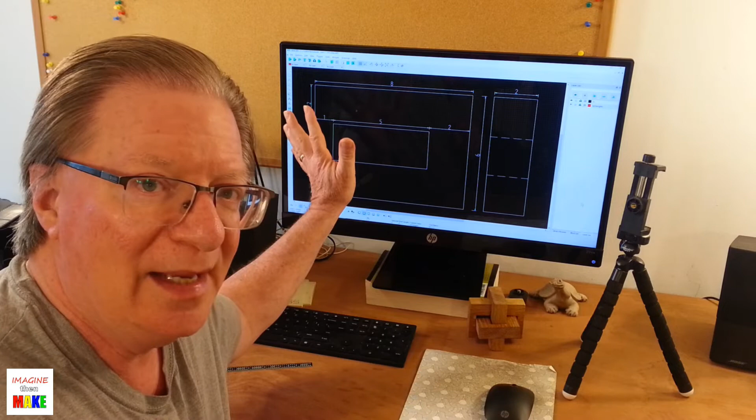I'm going to be looking at using LibreCAD and specifically using the print to scale feature that's built into the program. I've been using LibreCAD for quite a while now, and honestly, I don't know why this particular use for the print to scale feature didn't occur to me earlier, but it just didn't. Now that it has, and I've had a chance to try it out, I'm excited to make a video about it because I know it's going to save me a whole bunch of time as I build projects. I thought maybe some of you guys would like to understand what I'm talking about and save some time when you're building your projects.

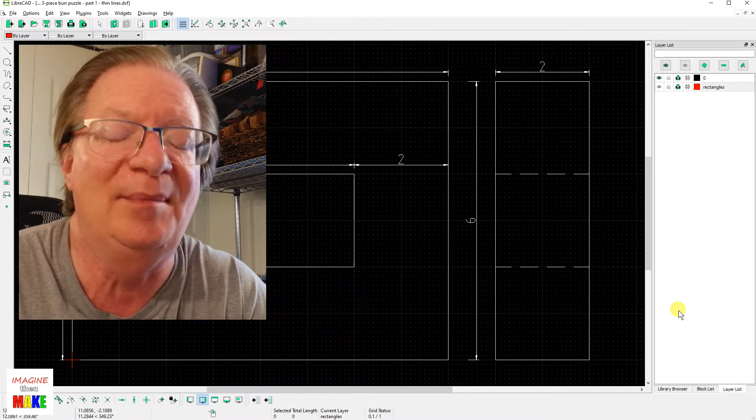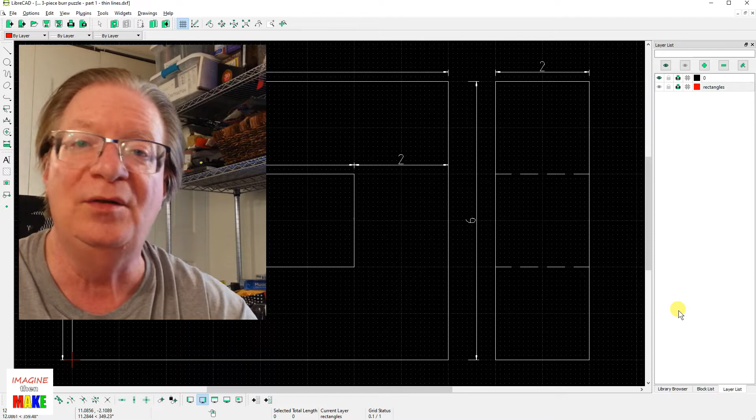You're probably wondering what I'm talking about with this print to scale feature built into LibreCAD. If I back up a little bit, in my previous video, I showed how I modeled a 3-piece wooden burr puzzle in Blender. Before I could create the 3D model in Blender, I described how I drew up the 2 or 3 pieces that make this puzzle up using LibreCAD. Here's what one of the drawings looks like, and here's what the other drawing looks like. The pieces are very close to the same - they're 2 units thick according to the drawing.

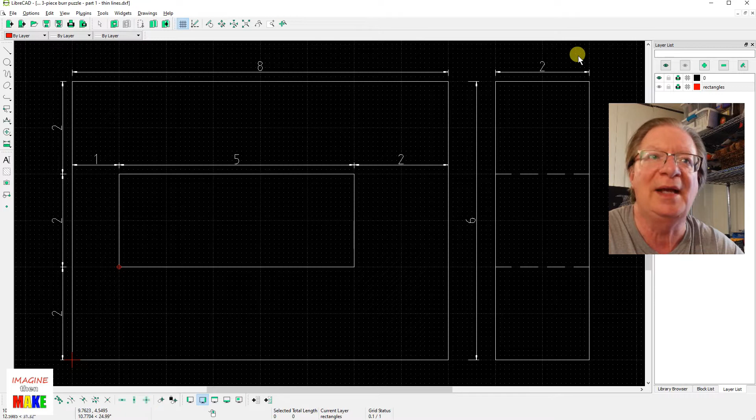You might notice, as I mentioned in the previous video, there is no measurement system attached. It's just 2 - it could be 2 inches, 2 meters, 2 millimeters, 2 centimeters, whatever. It's whatever the maker decides they want to use as a scale for their parts.

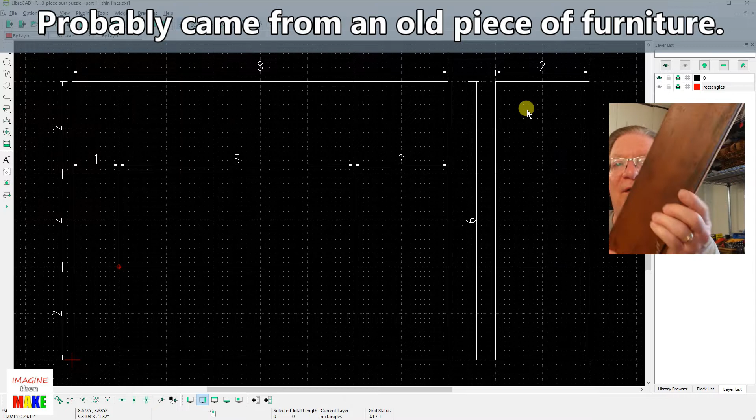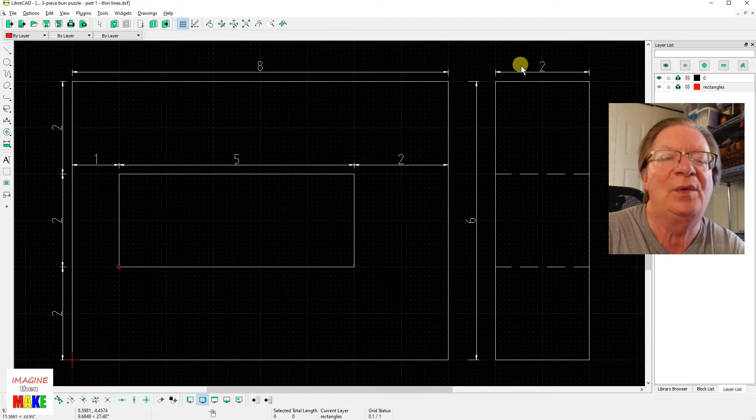So what did I want to do? Well, I have this piece of wood here, a reclaimed piece of wood. It's fairly flat, fairly straight, and you can see it's been used - one side is finished and the other side is not. When I measure this piece of wood, it measures 3/4 of an inch thick. So what I want to do is rescale my drawings for my puzzle pieces so that instead of 2 here, I have 3/4 of an inch. So how do I do that?

So 2 divided by what number equals 3/4 of an inch? And that number we're solving for is the scale factor. It turns out that if you solve the equation for the scale factor, you take 2, which is this scale right here, this number, and divide it by 3/4 of an inch, which is the thickness of my piece of wood. When I do that, the scale factor comes out to be 2.666 on and on forever until eventually your calculator rounds the last 6 to a 7.

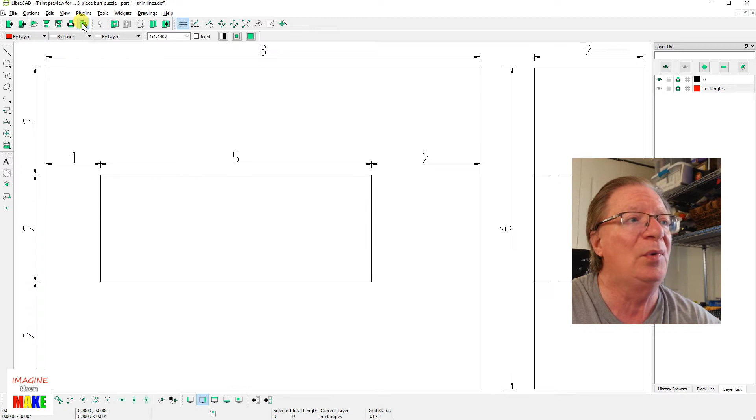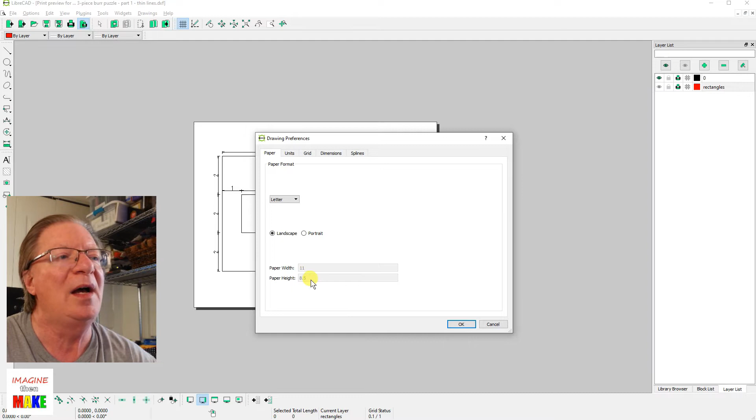So this is what I can do with that number. If I go into print preview and scroll out with my scroll wheel, you can see it's sized the drawing - it already put a scale factor in to keep my entire drawing on this piece of paper. Now the size of my paper is set at letter size, which is 11 inches wide and 8.5 inches tall because I'm in landscape mode. I'm in the United States, so I use this size paper. So if I was to print this drawing at 1:1, in other words full size, if I click the little down arrow and choose 1:1, now you see the drawing doesn't all fit on the paper. The drawing is too big.

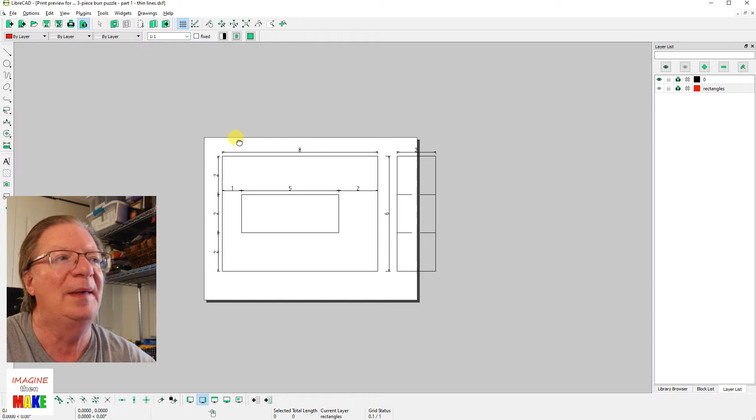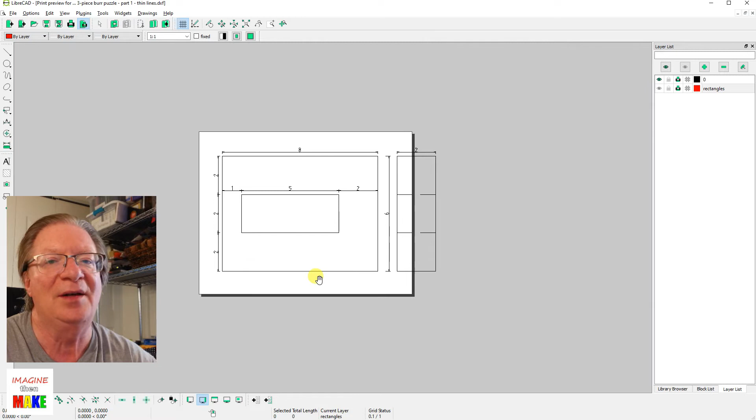Well, I want to go in the opposite direction. I want to make the drawing smaller so that this box right here, when it's printed on my printer, measures with a ruler to actually be 3/4 of an inch thick. That way I know all the rest of these dimensions have been scaled down, and I can use this as a template along with my scroll saw to cut out the pieces.

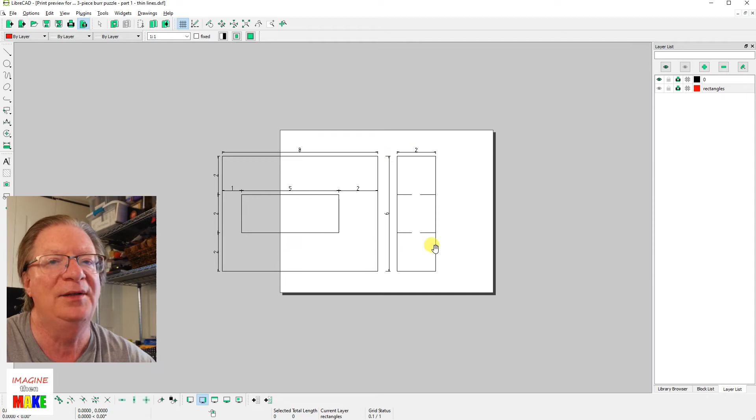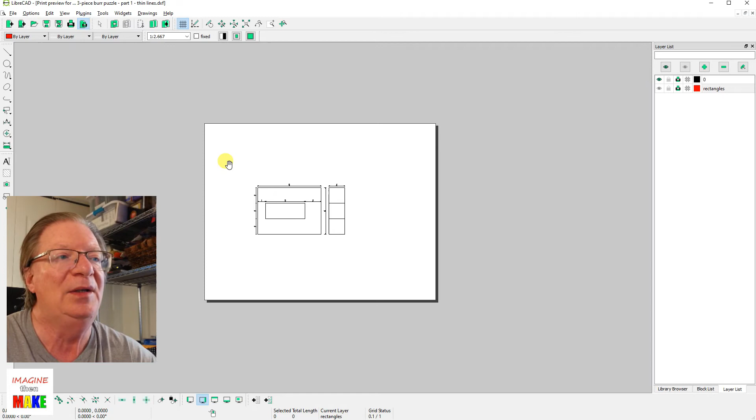So just to show you, I will go ahead and print this full scale 1:1, and I'll show you in a minute what this box actually measures out as. Then if I go back into print preview, this scale box here, and I change the scale to 2.66 - I'll just use 2 sixes and a 7 - press enter. Okay, scroll out with my scroll wheel, and now you can see the drawing has been shrunk or scaled down. Now if I print this, you're going to find, and I'll show you, that when I measure this box, it now measures 3/4 of an inch instead of 2. Let me show you that right now.

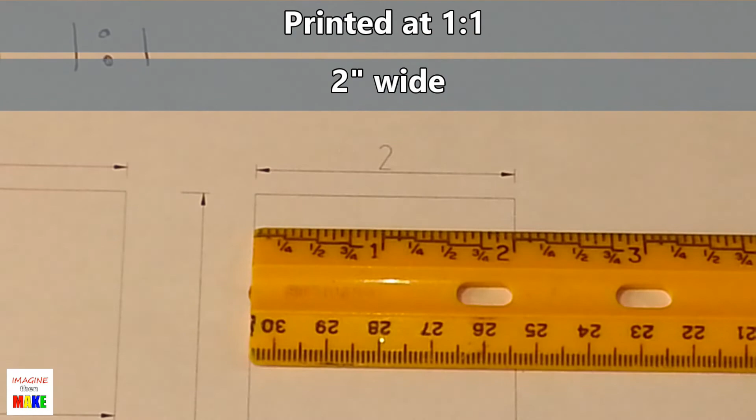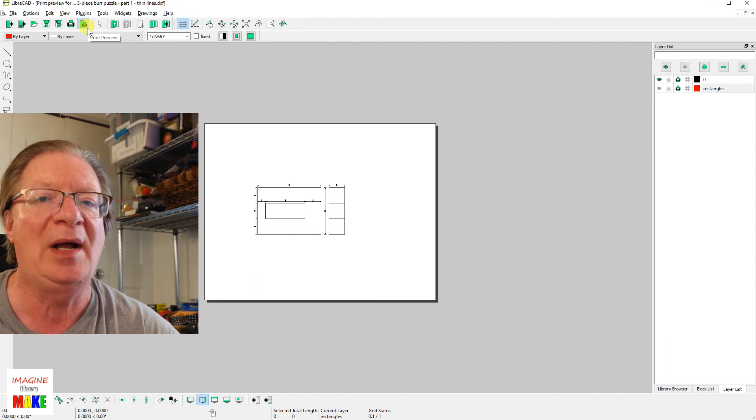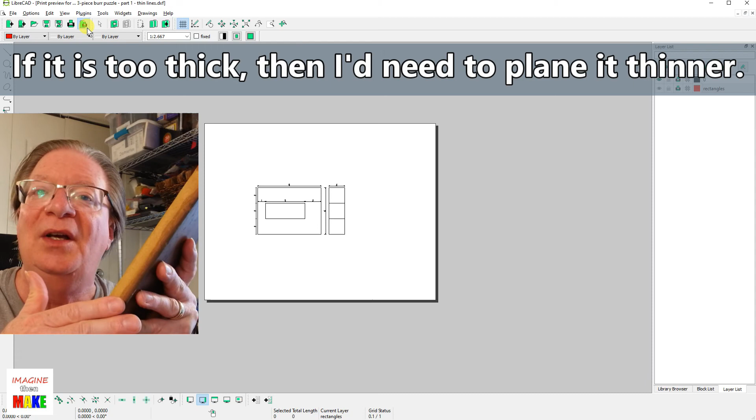So now that you saw the drawing printed out to the correct scale, why is this exciting? Well, it allows me to scale or change the size of my drawings for my project to match the piece of wood. Most of the time, I do the opposite - I find some wood that matches the scale drawings that I've created. Sometimes if the wood is too thin, I have to build it up by gluing on some thinner pieces on top. Or if it's not wide enough, I'll edge to edge glue some boards together to make a bigger piece of wood and so on. Hope you get the idea here.

The old way I used to do it is I match the piece of wood to the drawing. Now I'm suggesting let's match the drawing to the piece of wood. I think for me, this is going to save me a lot of time.